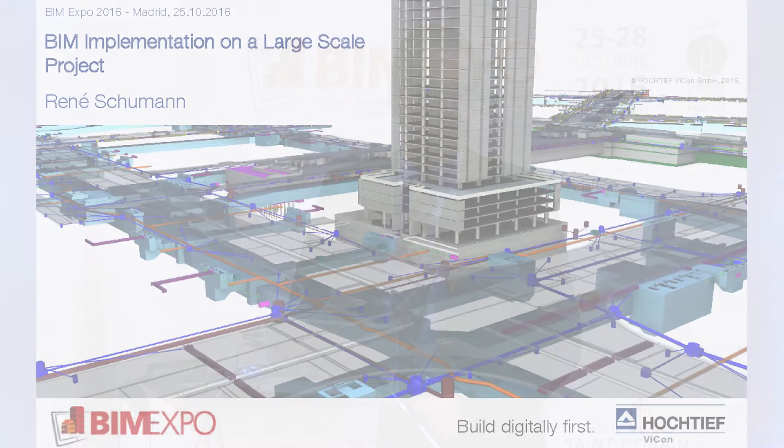I hope you enjoyed the lunch break after this interesting morning session, and I hope I can wake you up a little bit for the afternoon session. Today I have prepared a little presentation. I hope the presenter stand isn't too small, and I hope it will work.

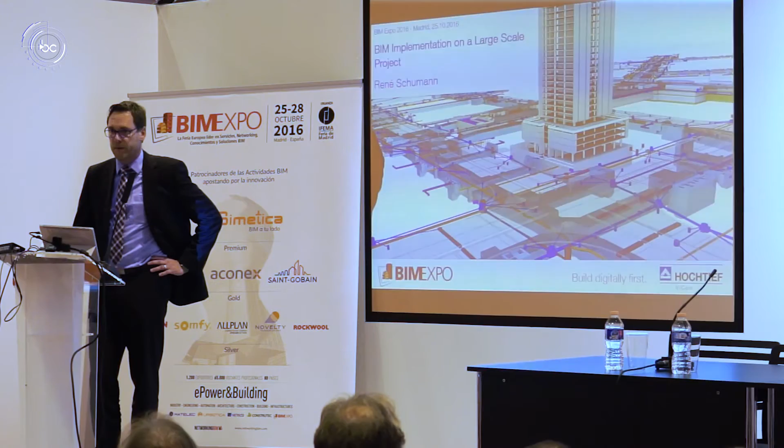I have prepared a presentation about a large-scale project we did in the Middle East a couple of years ago. I would like to share what we learned on large-scale projects and how to best implement building information modeling in design and construction projects.

First, a couple of words about my company, Hochtief ViCon. ViCon stands for Virtual Design and Construction. We are a pure BIM consultancy firm, meaning we don't do design or construction services. Our core profession is building information modeling.

We've done this for more than 10 years now. We offer services for implementing BIM in organizations or projects, and we help execute BIM in design and construction projects - we call it BIM management. And of course, from our history, we are also able to develop 3D, 4D or 5D models with our people.

Our setup is around the globe. Our headquarters is in Germany, in Essen. We have a branch in the UK, a branch in the Middle East, as well as in India. We have projects executed around the globe over the past decade - more than 400 projects altogether.

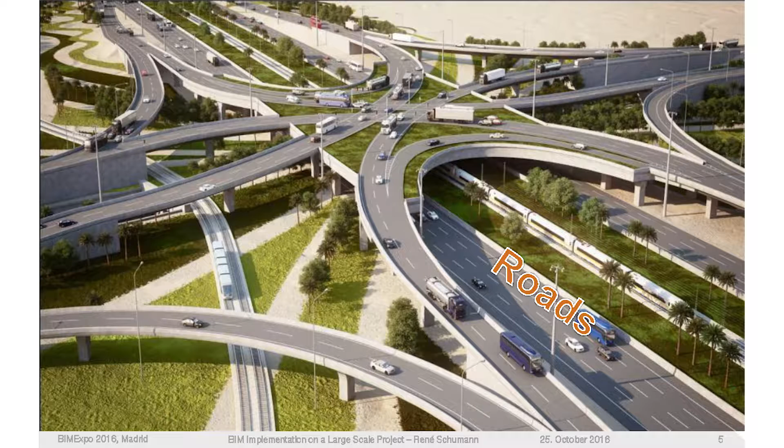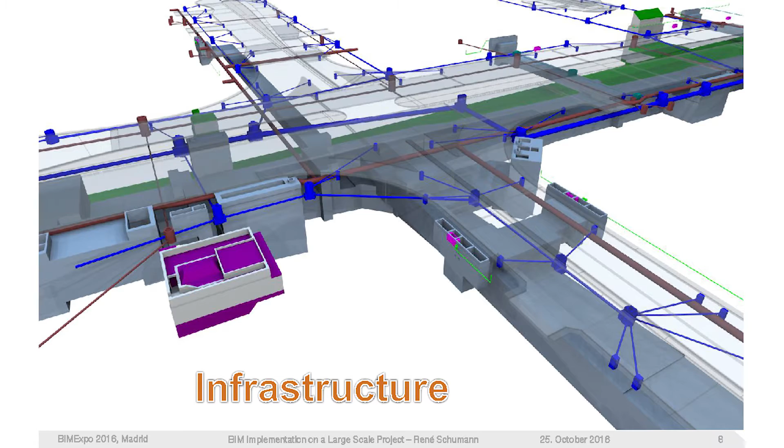We bring knowledge from high-rise buildings, and that is maybe a message you can take with you: the concepts of BIM can be used in different project segments. We have analyzed it in high-rise buildings, roads, bridges, as well as stadiums and city infrastructure. So the methodology is pretty similar. Of course the business is much different, but the methodology in terms of working with digital data is similar.

As I said, today I would like to speak about some implementation basics before I come to major BIM use cases on a large-scale project. And of course, I would like to show an example of a digital model we have developed so far.

One challenge would be what software to use, what hardware to buy for your people, who could be the BIM manager with experience, how to organize collaboration, how to do design coordination, how data exchange is organized, what formats to use. So there are a lot of different questions which we haven't had before in our business that come with BIM.

I don't want to make you afraid of implementing BIM, but all these questions brought us to an approach we call the 5 components approach. We said when it comes to BIM, it is not only about technology, as many people believe - that I buy software, I buy hardware, and then I'm able to do 3D modeling. Maybe that's right, but we believe there are other things important to think of.

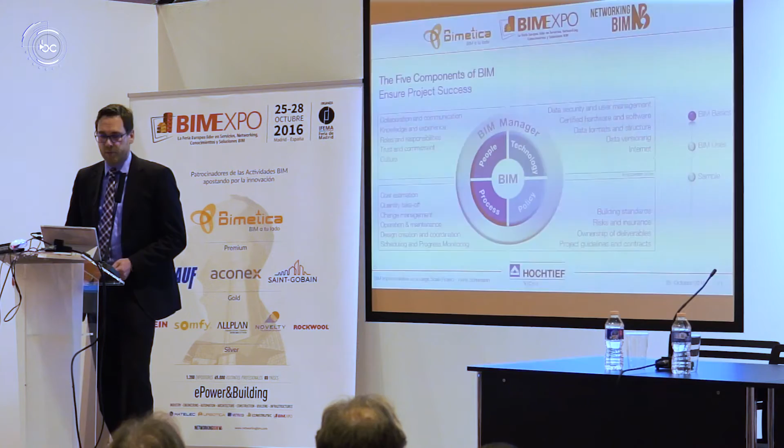Altogether, that's only 4 components I've shown here. Of course, number 5 is the new role in the industry: the BIM manager. He's the guy putting together digital data and digital workflows. That's a new role in our industry, not just a former design manager renamed into a BIM manager. It's a new person with a new skill set, and that's very important to finally have success with BIM implementation.

Maybe you would say, how can I manage the quality of BIM deliverables for my business if I have other stakeholders in front of me? If you are a contractor, you rely a little bit on the data provided from the design firm. If you are a design firm, you rely on data maybe provided by somebody else in front of you.

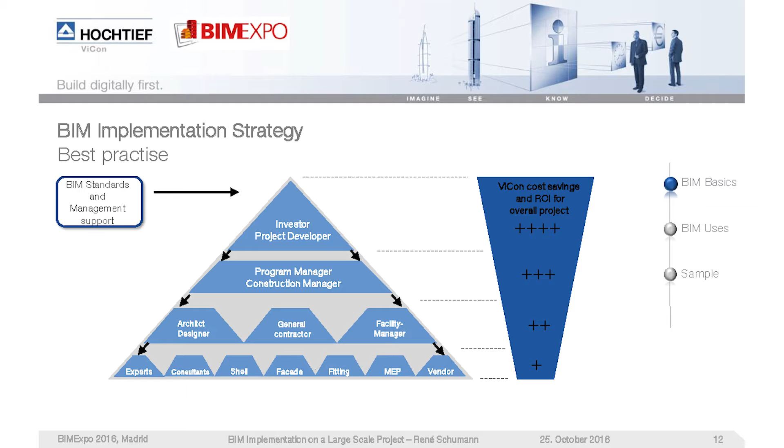We believe the most effective way to implement BIM in a bigger project is through the project developer or the construction manager. These two organizations are the only ones able to set up rules on a project that need to be followed by everybody involved, which is important because one critical factor is a clear structure of your data, a clear work breakdown structure within your project. The project developer is the only one in a position to define how this works. So we prefer, when it comes to implementation on bigger projects, to do it together in agreement with the developer, the owner of the project.

Level of detail, level of development. We made a mistake when we started more than 10 years ago with our engineers and employees: we started to develop a highly detailed model, as much as we could. At the end of the process, we were pretty proud to have such a model, but the problem was keeping it updated all the time. You need somebody to pay for a very detailed model continuously updated during the design and construction process. That's the reason we developed a model definition that specifies what level of detail you need within your project.

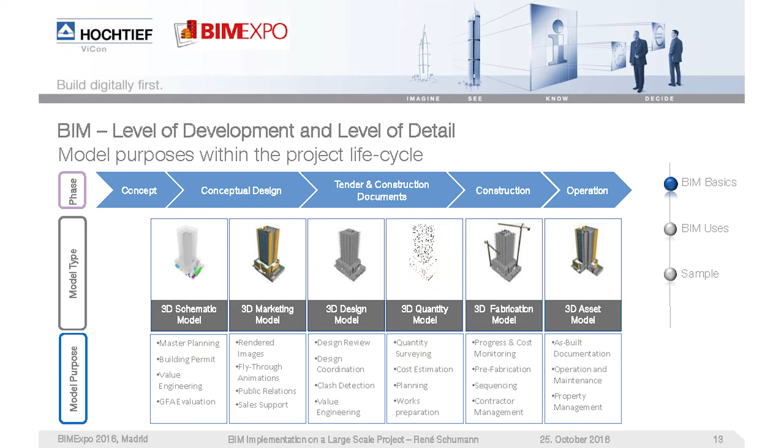It starts with the concept phase and ends with the operation phase, supporting the entire life cycle. Important is that we focus on elements we already know today: what is the purpose, what you want to do with a digital model. We know tasks like master planning, design coordination, progress or cost monitoring. We specified model types according to these purposes so the model fits its purpose, which helps decide when is the right time to develop what kind of digital model. I'll show later a few examples of these model types.

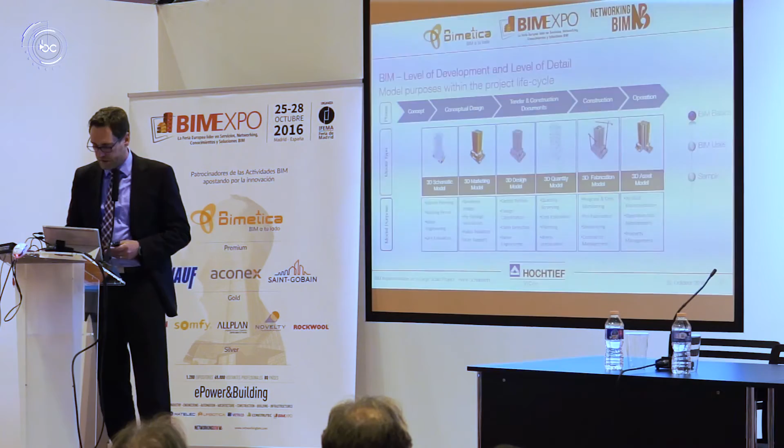I saw a similar slide this morning in the second presentation, about project information throughout the life cycle, and that's a bit the motivation for BIM as well. What happens in our projects: if the designer starts doing a design, he's building up knowledge about the facility. Once it comes to tender and construction, you lose a bit of this knowledge from the designer. The contractor starts, he needs to understand the design, bring his own concepts, maybe value engineering, but there's a little loss in information. Then again the contractor builds up knowledge about the facility, and the same thing happens after construction - once it's handed over to a facility manager, we lose information again at that interface. This is something BIM can help with, minimizing losses of information so data goes through the project lifecycle and doesn't stop at the end of a particular project phase.

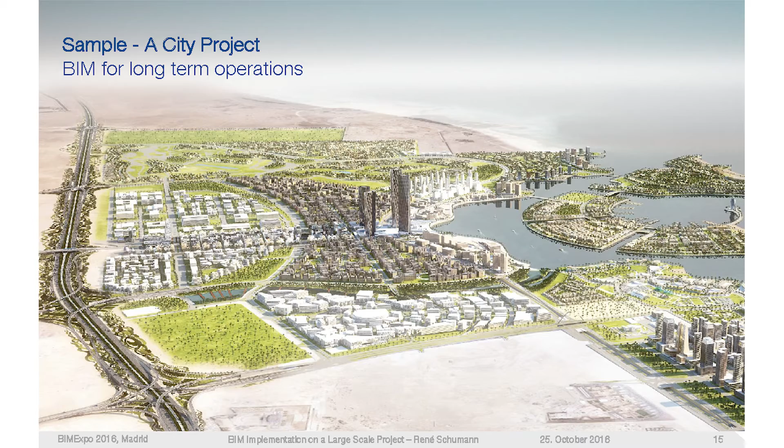A sample project I'd like to showcase is the Lusail City project in the Middle East. It's located in the state of Qatar, north of the capital city Doha - an absolutely new city built. Some key facts: it's a 37 square kilometer development in the middle of the desert, 17 districts to develop, 2,763 plots, and the city is made to accommodate 200,000 people. Quite a challenging task.

At the same time, it has the first rail system in the state of Qatar - rail was not usual, this is the first city. The longest district cooling network, the first gas network - that was surprising to me, because Qatar is one of the biggest gas producers in the world, but they don't have a national network of gas pipes. This was the first city with a network.

Most of the city utilities have been developed in a utility tunnel, and that is the longest tunneling project the state has. In fact, the longest utility tunnel in the world. So definitely an ambitious project.

We came to the project when the design was already started for the infrastructure works, and the project developer asked us how we can support with digital data, with building information modeling. How can we support this project? How can we enhance the design phase, and how can we enhance the output of construction phases?

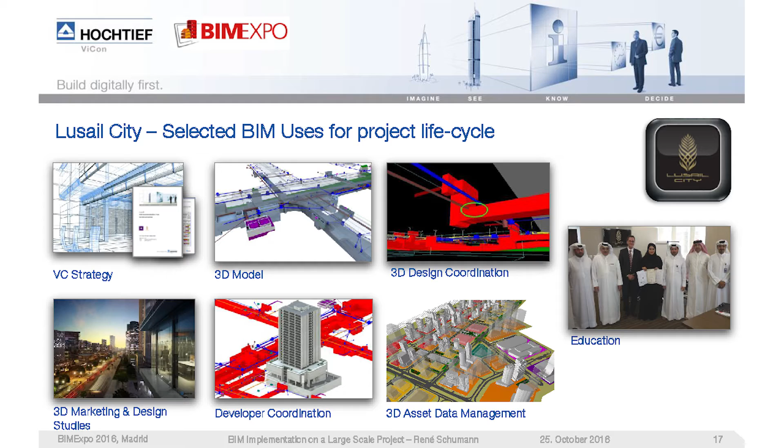Finally, an important factor was the education part. Of course, BIM knowledge is not easy to get because it's not standardized at that time. We said, okay, we will establish BIM education for the project team on site, so that they can take over and do BIM with their own team.

We developed a model together with the design consultants. The model has 145,000 meters of highways and roads, so quite a big one, 76,000 foul sewer pipes, almost 200,000 stormwater pipes. So quite a big digital model we developed.

We used the model for infrastructure in order to coordinate the development of the entire city. The situation was that each plot was sold to a project developer, and the project developer, according to a master plan, had the opportunity to provide his design. This design, of course, needed to be checked and approved, and everybody needs a building permit in order to start construction works.

We thought, how can we support this process and do it digitally with 3D models? What we have done is included in the specifications for the developers a schematic model definition. So each developer has to provide a very simplified model that is used to automatically check the building permit. What we have given him as compensation and as better project preparation is a digital model of the entire infrastructure around his plot, so he could see in 3D all the infrastructure elements around his own development.

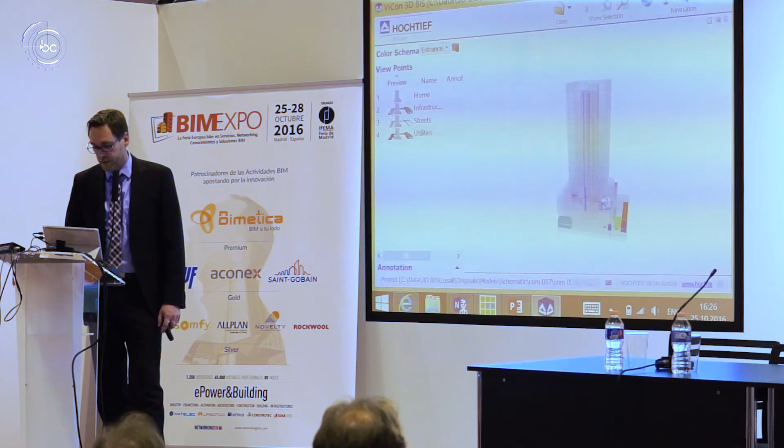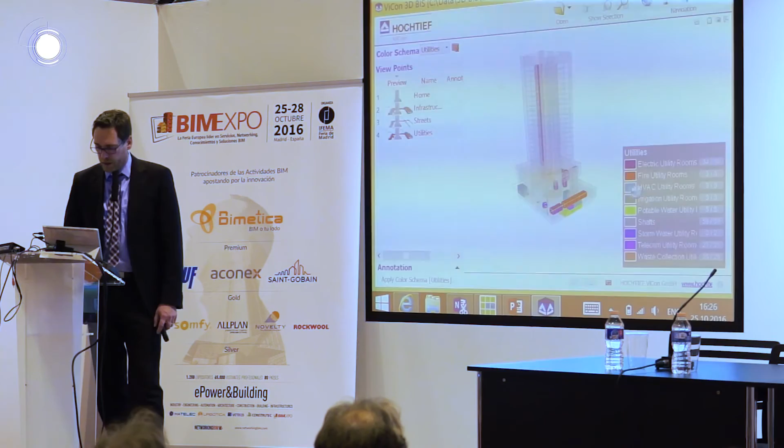It is used for automatically checking master plan regulations and providing a digital building permit. You see that we have each floor represented by a cuboid, we have the vertical shaft, and we have the major utility rooms included. Red, for example, is the fire utility room. Light blue is the mechanical room, HVAC, and so on. Of course that was brought in relation with the surrounding infrastructure, so we see where's the plot connection for power, for gas, for water, and so on.

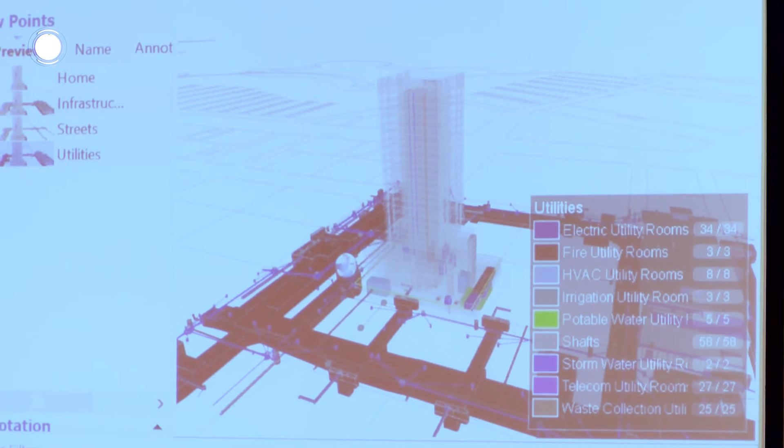We coordinated the infrastructure in relation with the high-rise design coming from the developer, and there was automatically a report about the maximum height of the building, the GFA area, the setback on the plot, that was printed out with a recommendation of approving the building or not. So this is just an example of how easy it could be to develop a schematic model for a building permit.

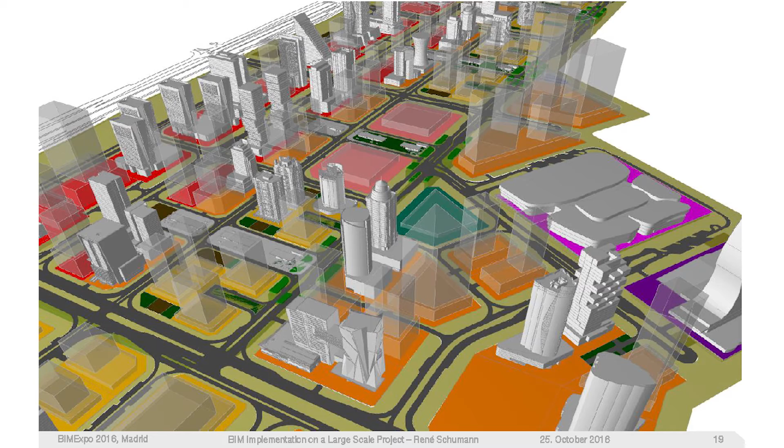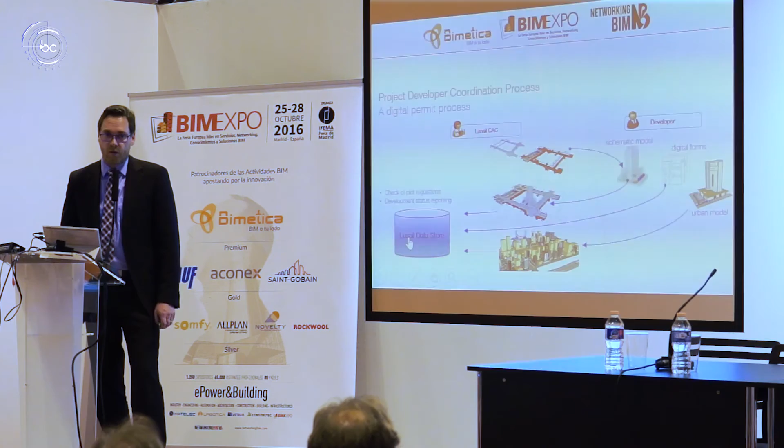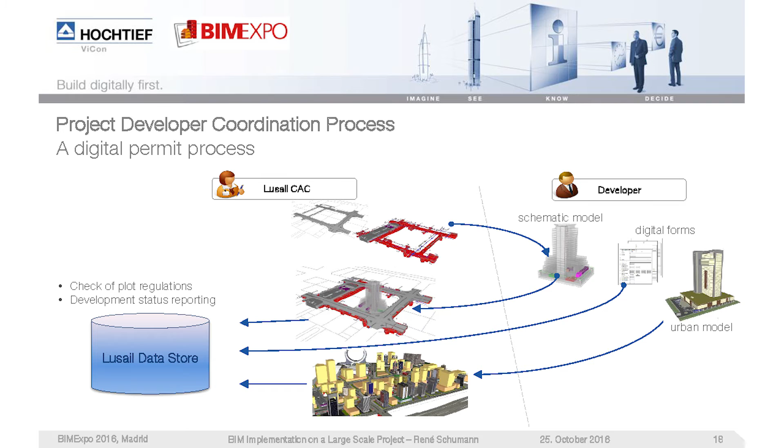There's just a placeholder from the master plan, and the model is maybe coming later. Important was that all data coming from these models were stored into one single database. That was crucial, because the question was how to deal with the as-built information for the infrastructure as well as for the high-rise buildings on a long-term basis. We decided on an SQL database because we thought that would be the most efficient and best way to store data for the long term.

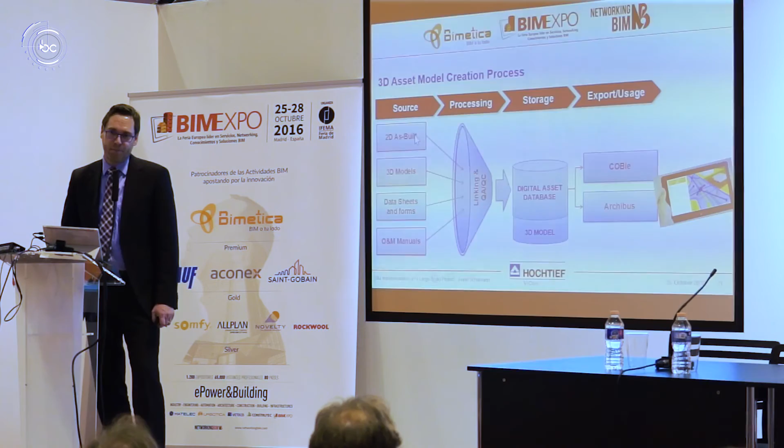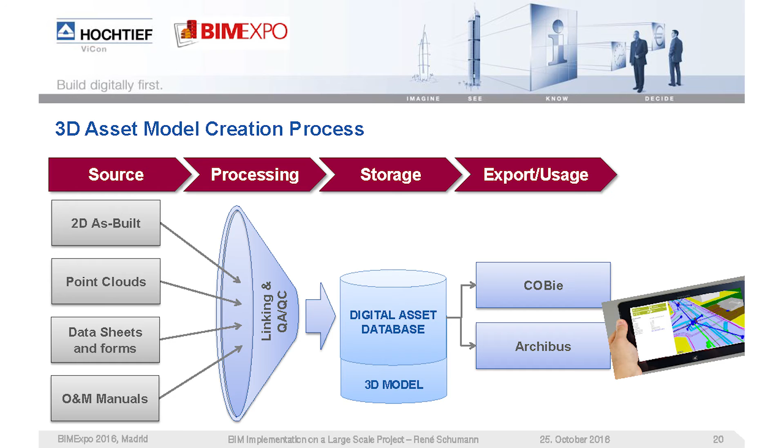This image shows how we have put together all the different data sources. Of course, there was 2D as-built documentation because there is no regulation on BIM in Qatar. That means all as-built documentation according to local construction standards have to be done in 2D, so 2D drawings are still considered for this project. We have 3D models, data sheets and forms, and operation and maintenance manuals. All of that got linked to each other and imported into these SQL databases, and from there we use it for long-term operation with systems like Archibus or Maximo, and we can export into COBie format, which is important for the facilities manager.

How does this data come to the site? Often in bigger projects, in the design phase you have an army of people working on a digital model, but if you go out to the site and ask the site engineer or somebody else, he doesn't know the model even exists. That cannot be the right way. The model must somehow go to the site as well, so that the people doing the construction can take advantage of it too.

What we have done is develop a system made for tablet PCs, considering the GPS position as well, so that if you go to a particular spot in the city, according to your GPS position, the system will tell you what is the right model to open for this particular spot, so you can quickly see the circumstances around you.

I would like to show a little example of this as well. Unfortunately the resolution is not the best, but I hope we can see most of the data. Here we have the digital model, and if I zoom out a bit, that is only one district out of 17 I have opened here.

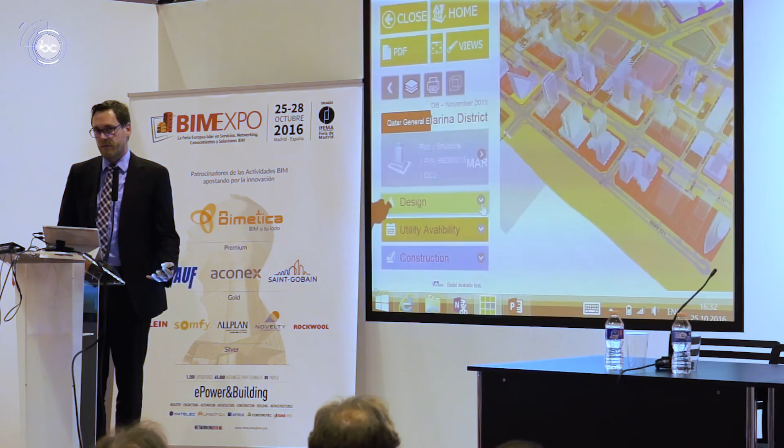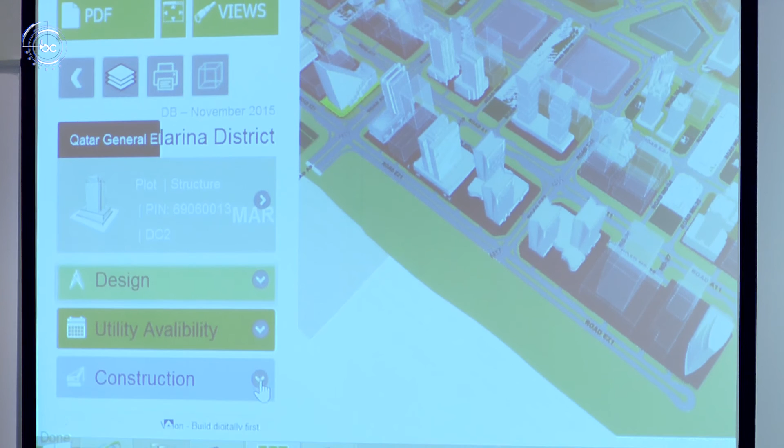We have all developer information included within this model, and we can now click on a particular plot and get information about who's the contractor - it's difficult to see, maybe I'll explain in words. You have the contact information, design information like what is the GFA area for this plot according to the master plan, what was developed in the design itself, what are the availabilities for utilities, so when this plot is fed with power, with water, when you can regularly use it, construction information like construction progress, where it is - shell and core structure, facade ready, finishing works, or maybe already in use.

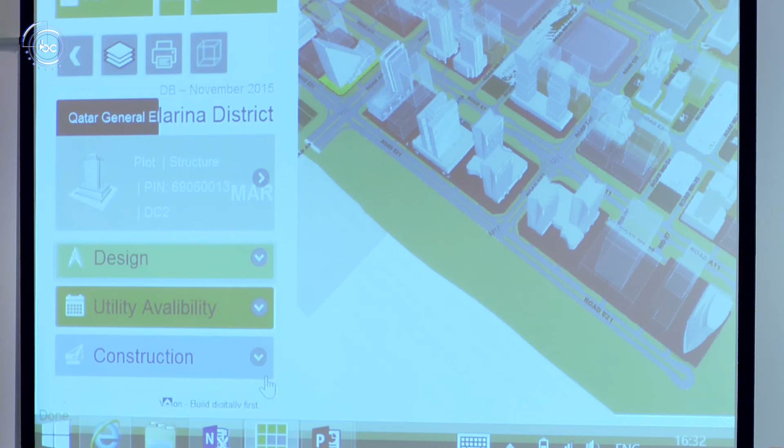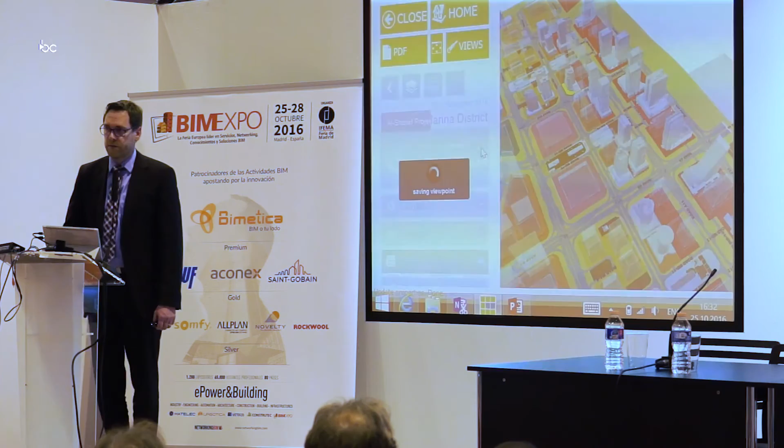So all of that is included in one single system, and maybe we can go even a step further in detail. I just select a building that has already been finished, so it's under operation. What we now get is a more detailed view of the project, because we came from the district level before and now we go down to a plot level, meaning we get more detailed information.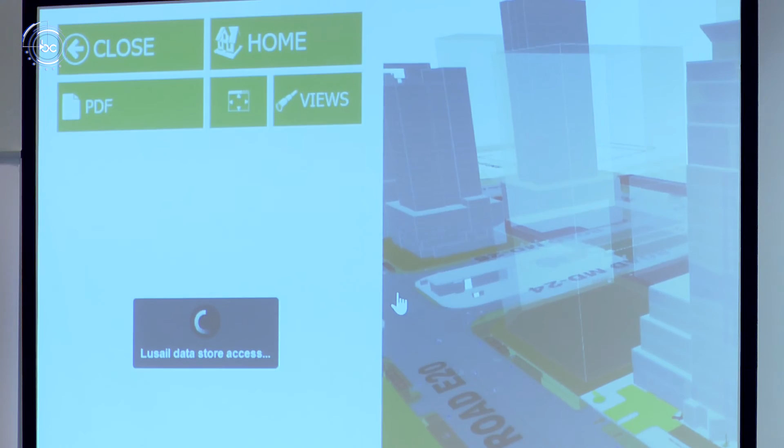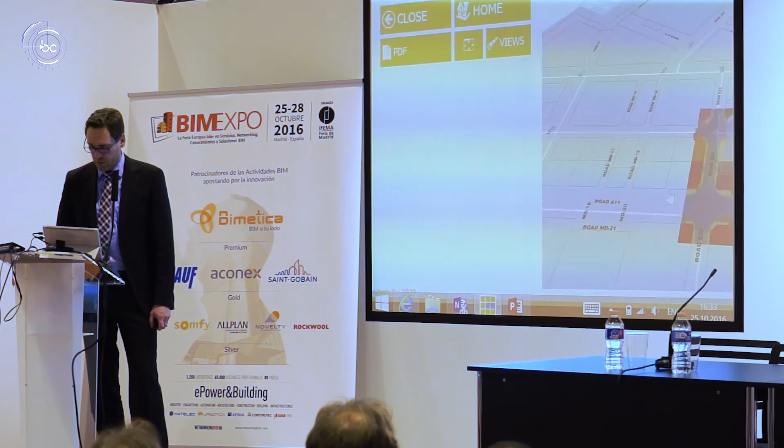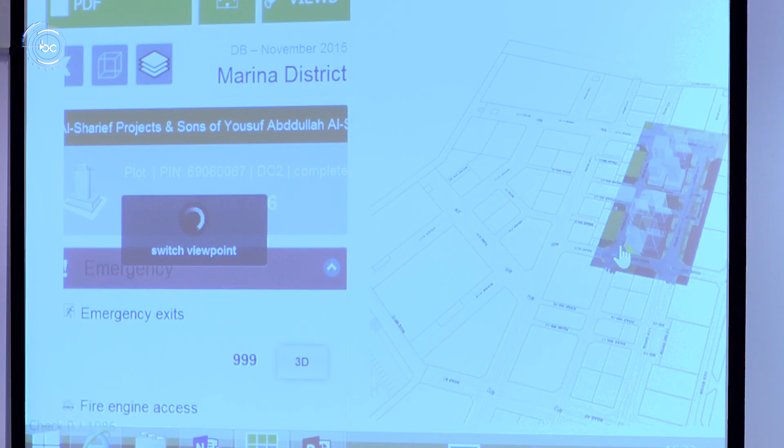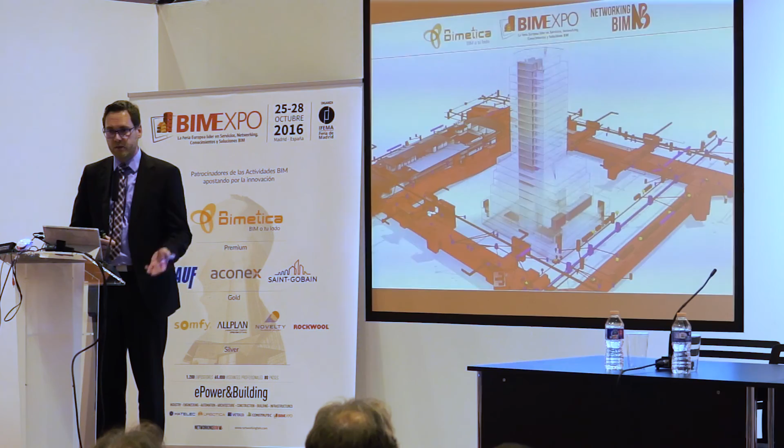You see that we have just a part of the district, not everything. We have some more information about emergency - for example, I could show all emergency exits of my selected building that has already been finished. You could see the exit routes out of the building, so in case of fire you understand quickly where the people are coming out of the building, how the distribution inside the building is, and that was quite important for the city authority to support security issues for the long-term future as well.

I would like to end my presentation with, maybe you could call it a recommendation, or an experience from the projects we've done so far. It looks nice when people show something here on stage, but it's important that you think about your own business and what would be the low-hanging fruits for yourself. That's what people sometimes forget - they do what they've seen somewhere else, but aren't focused on their own business, on how to do the digital workflow for themselves, how to benefit best from BIM for their organization.

And there are always different ways to do it, of course. There is no right or wrong - maybe a better or not so good way, but there are many ways that can support you, so be open to that and think about how you can do it for your company.